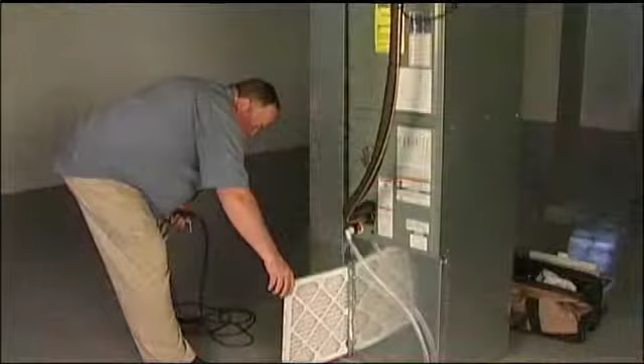It seems like the price of energy keeps going up. As a result, many people are learning to reduce their energy costs by using energy more efficiently. In this module, we'll discuss several ways to be more energy efficient so you can save money on your utility bills. But before we look at what we can save, let's first look at what we spend.

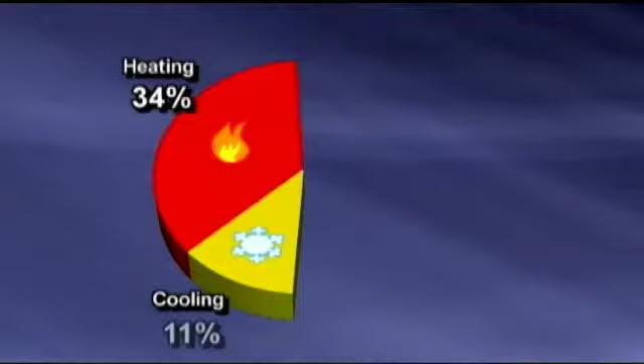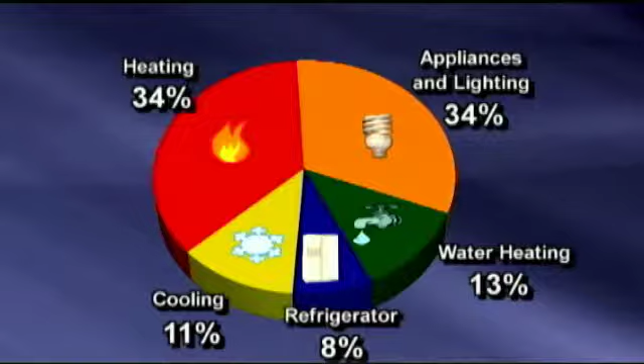The largest part of the average utility bill is spent on heating and cooling. According to the U.S. Department of Energy, the typical home uses about 34% of their total energy for heating and about 11% for cooling. Refrigerators account for about 8%, while lighting, electronics, and other appliances make up about 34%. Finally, water heaters use about 13% of the total energy cost in our homes. Throughout this module, we'll see how you can use less energy in each of these areas.

Section A, Heating and Cooling. As we've seen, heating and cooling uses more energy than anything else in your home. As a result, it's also the area where you can save the most. To begin, we'll look at the winter months and see how you can save money, yet stay comfortable during the coldest months of the year.

You may be surprised how much money you can save with just a slight change to your thermostat. In fact, during the winter months, you can save up to 5% on your heating bill for every degree you lower the indoor temperature. So, for example, by lowering your thermostat just 5 degrees, your heating bill could drop by 25%.

During the winter, we recommend setting your thermostat to 68 degrees during the day if you're at home, and at 63 degrees when you're asleep or away from home, unless you need the temperature higher for medical reasons. It's a good idea to turn the temperature down at night since you'll save energy and money while you sleep.

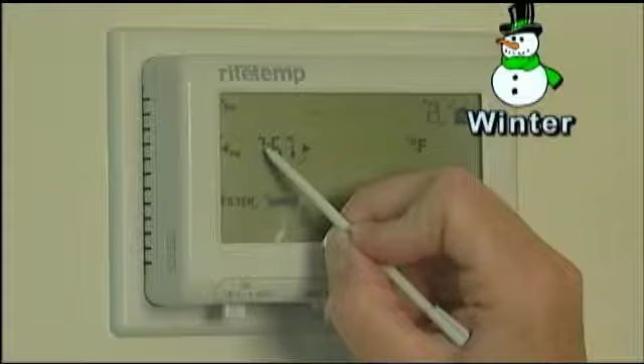If you don't think you'll remember to turn the temperature down, you can always buy a programmable thermostat to change these temperature settings for you automatically. Make sure you buy the programmable thermostat that's suited to the type of central system you have. And if you have room-by-room heating with individual room control, set it back or turn it off in rooms you're not using.

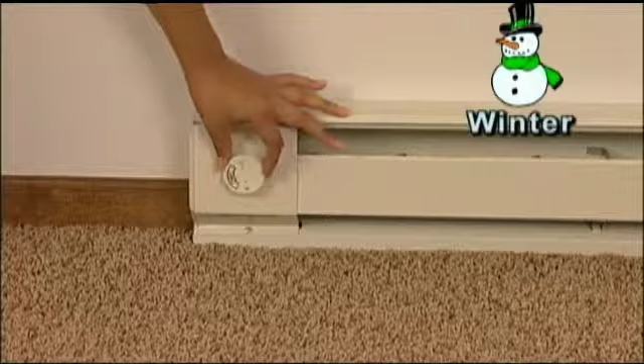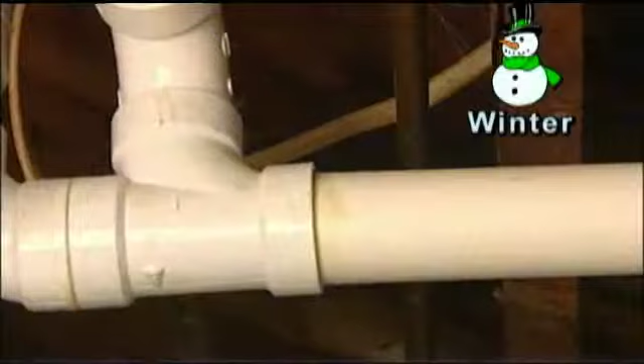Finally, if you're going to be away from home for several days or longer during the winter months, we recommend setting your thermostat to 55 degrees. If you shut your heating system off completely and your house gets too cold, water in your interior pipes can freeze and cause them to break.

By setting your thermostat to 55 degrees, you'll still save a lot of money on your utility bill, but your house probably won't get cold enough to freeze your water pipes. If you rent, it's a good idea to talk to your landlord or building manager before setting your thermostat this low.

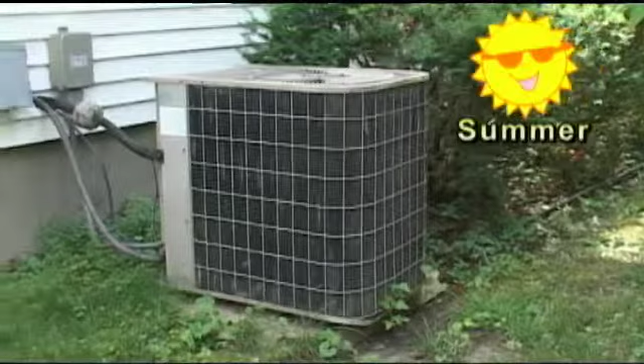Now, let's skip ahead a few months, from winter to summer. During the hot summer months, only run your air conditioner when it's necessary. In the evening or on cooler summer days, open up your house and use fans to bring air in. Take advantage of moderate temperatures and lower humidity when you can. After all, there's no point in air conditioning your home if you don't need to.

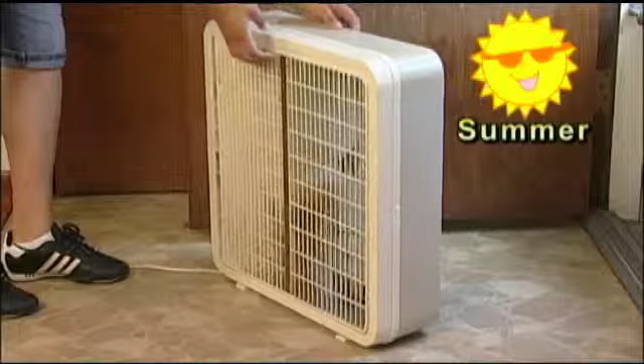When you do need to run your air conditioner, close up your house and set your thermostat to 78 degrees. To make your house even more energy efficient, here are some additional summertime tips. Turn up the thermostat 3 to 5 degrees when you're leaving for work or going away for a weekend. Install ceiling fans throughout your house. They can make the temperature seem about 4 degrees cooler inside.

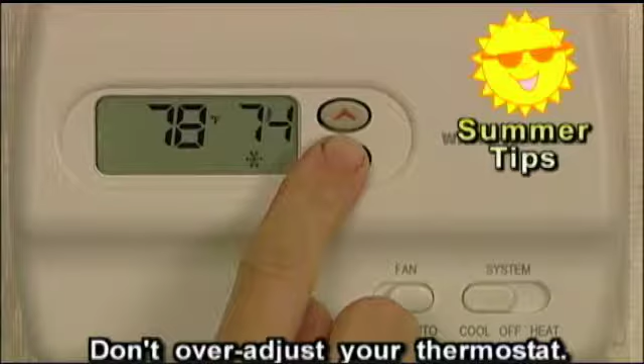If you have window air conditioners, only use them in rooms where you spend most of your time. Use your stove and other heat-producing appliances early in the morning or late in the evening. Remember not to adjust the thermostat to a colder temperature to cool a room quickly. The room won't cool any faster, and you'll just end up wasting energy. Just set the thermostat to the temperature you want.

Plant trees to shade your home, especially near east and west-facing windows. In addition, evergreen or fir trees can help block cold north and west winter winds. By shading your air conditioning unit, you can increase its efficiency up to 10%. Be sure that shrubs are at least 2 feet away from the unit so they don't block its air circulation.

Keep the hot daytime sun out of your home by using drapes, blinds, or shades on your windows. Keep lights low or off and use fluorescent lights since they produce less heat.

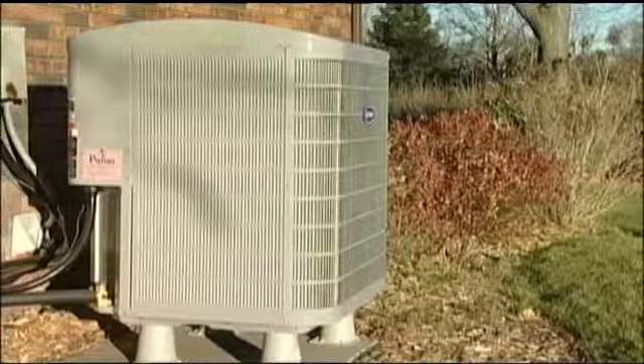So far, we've seen how you can use your heating and cooling equipment more efficiently. Next, we'll look at how to keep it running properly and safely. Without regular maintenance, your furnace, air conditioner, heat pump, and other equipment can become less effective or even dangerous. To keep everything running right, heating and cooling equipment should be checked and serviced every year by a qualified professional.

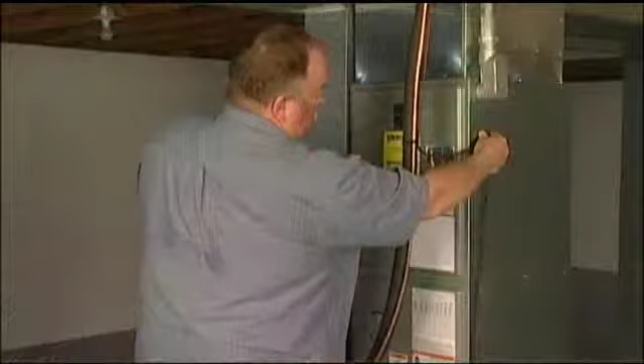If your furnace isn't running properly, or if you have a blocked flue pipe, it could spread dangerous carbon monoxide through your home. Carbon monoxide is an odorless and colorless gas which can kill. Symptoms of carbon monoxide exposure, such as headaches, dizziness, and nausea, are easily overlooked since they can seem like the flu. To protect yourself and your family, you should install carbon monoxide alarms on each level of your home and check them every few months.

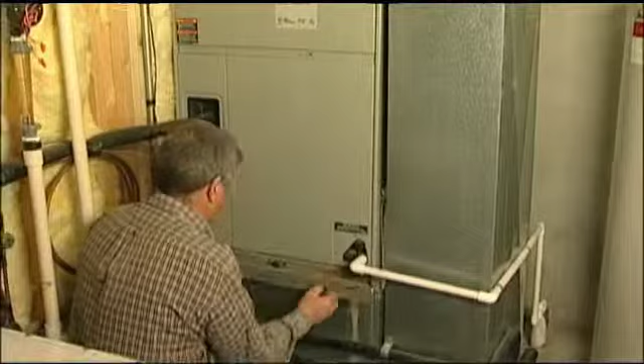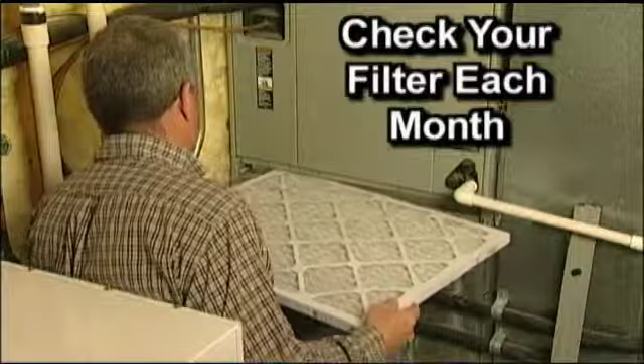But even with these alarms, it's still very important to schedule a professional inspection of your heating and cooling equipment each year. In addition to the yearly inspection, you'll also need to clean or replace the air filters in your system fairly often. Changing these filters is quick, inexpensive, and easy enough to do yourself. Check your heating and cooling system filter each month, and if it's dirty, replace it. If you are a renter, be sure to ask your landlord who's responsible for cleaning or changing these filters.

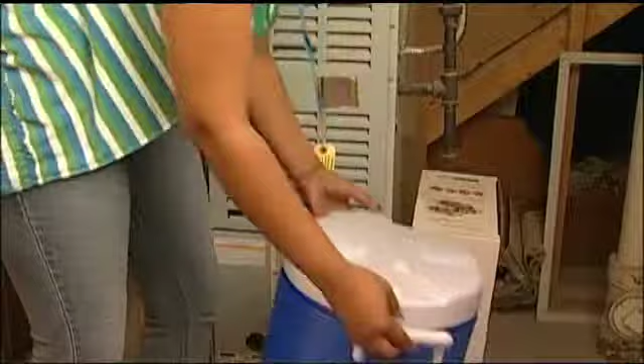Also, since home heating and cooling equipment needs good airflow to work properly and safely, you'll need to keep the area around your equipment clear. In particular, if you have a furnace or hot water heater in a closed area or closet, you'll need to be sure that air can get to that unit easily.

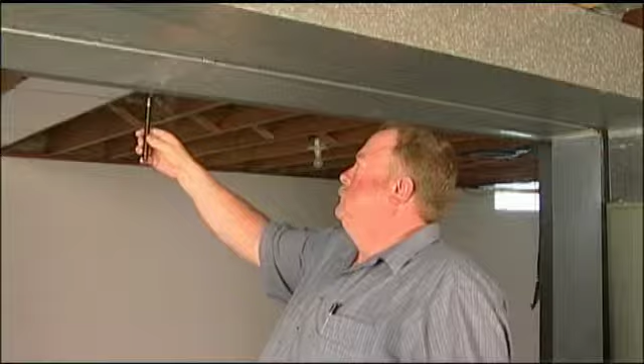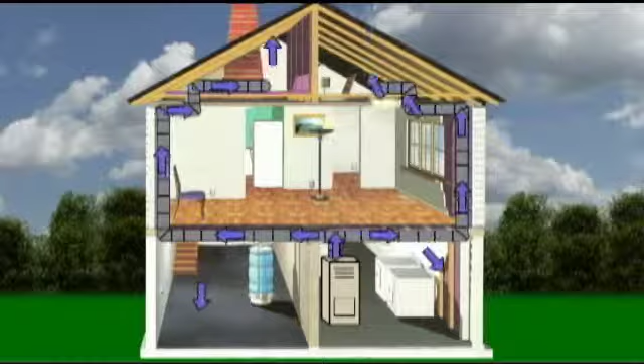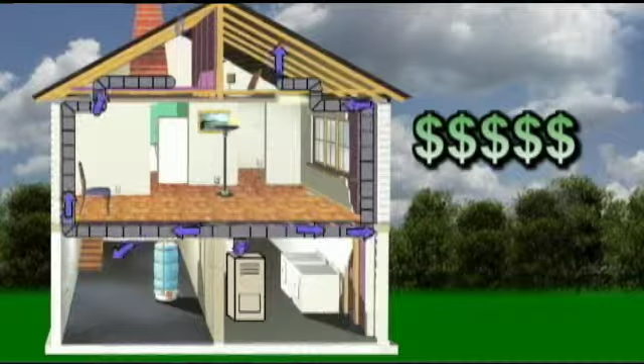To get the most out of your equipment, it's also a good idea to have your ductwork inspected. If you have a central heating or cooling system, conditioned air moves through the ductwork to each room in your house. If ducts don't move air properly or aren't well insulated, you end up paying to heat or cool air that doesn't go to the right place. Some homes leak 15 to 20% of their conditioned air into attics, crawl spaces, walls, basements, and garages, which can add hundreds of dollars a year to your utility bills.

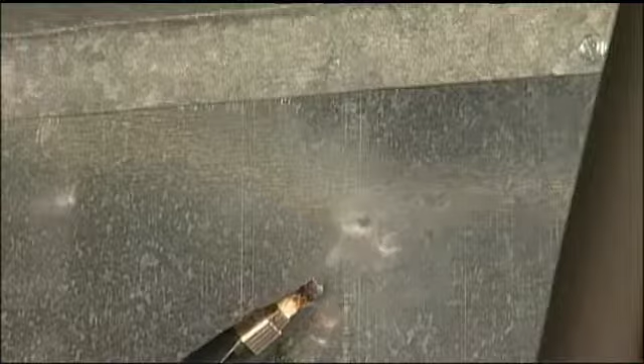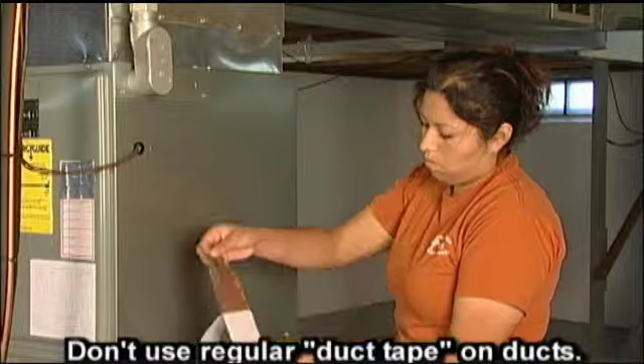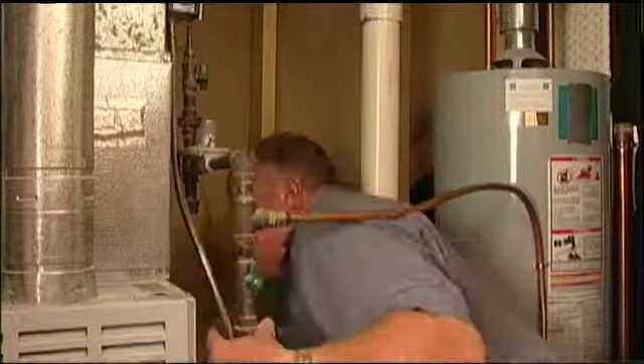To keep your air distribution system working efficiently, it's a good idea to have a professional inspect and test your ductwork for leaks. If you want, you can even do some of the repair work yourself. For example, leaking duct seams are easy to fix. Although some people use regular duct tape to patch ductwork, it's not a good idea, since there are much better products available these days. The proper way to seal joints, seams, and gaps in your ductwork is to either use mastic, which is a thick paste, or Underwriters Laboratories approved foil-backed duct tape. Some parts of your ductwork may be difficult to get to, but don't ignore these areas. Instead, have a qualified professional seal any ducts you can't fix yourself.

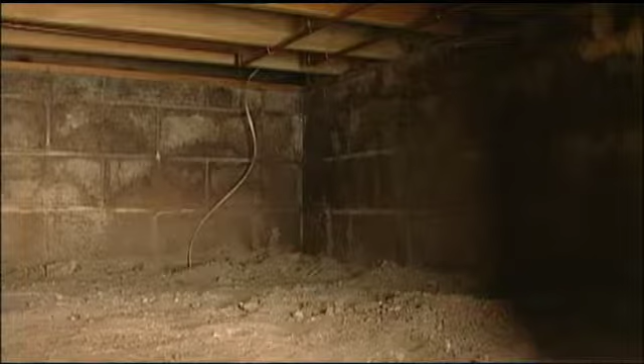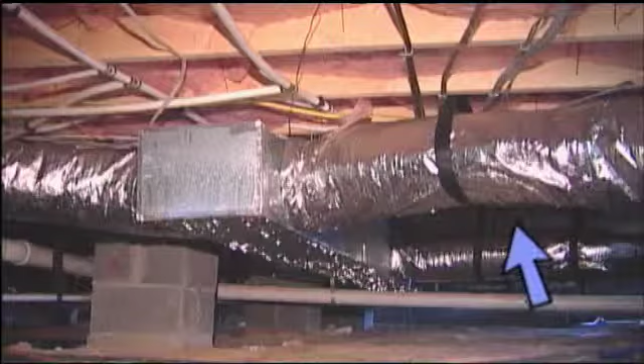If you have ducts in unconditioned areas, such as crawl spaces or attics, you should not only have them checked for leaks, but you should also have them insulated. Keep in mind, however, that during the winter months, insulated ducts will not heat up your attic or crawl space the way they used to. This means that if you have water or drain pipes in the attic or crawl space, they'll be more likely to freeze and crack. So if your attic or crawl space has water pipes, you'll want to talk to a professional before insulating any nearby ducts. If you rent, be sure to ask your landlord if these things have already been taken care of.

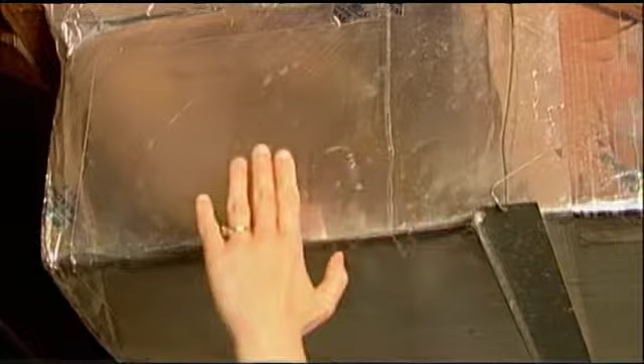Finally, after inspecting, sealing, and insulating your ductwork, be careful not to block the airflow from the air vents, radiators, or baseboard heaters. After working hard to have efficient ductwork, the last thing you want to do is block your vents. Air systems work more efficiently when all the vents are open and unblocked. This will give you an even flow of air throughout your rooms. Air deflectors and extenders are also available if you want to direct the air in a certain direction.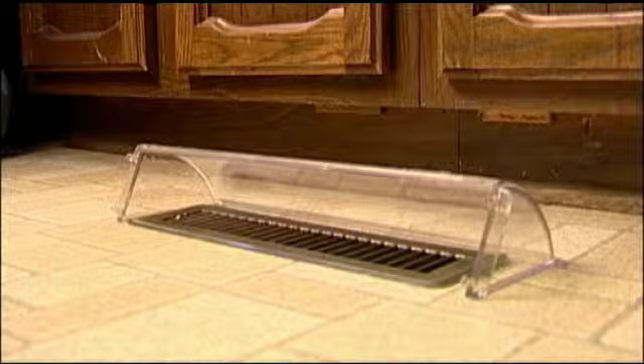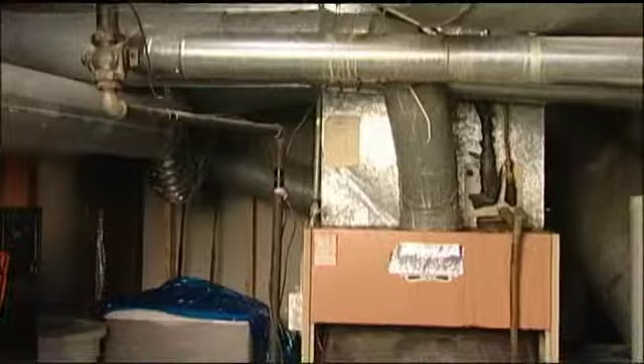So far, we've talked about the maintenance of your heating and cooling equipment. But before we finish, it's important to note that even with the best maintenance, this equipment won't last forever. Eventually, these units will need to be replaced. When you do decide to buy new heating or cooling equipment, look for Energy Guide labels to compare efficiencies and purchase the most efficient model you can afford.

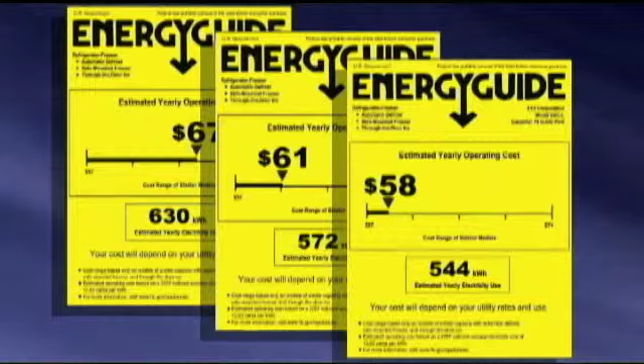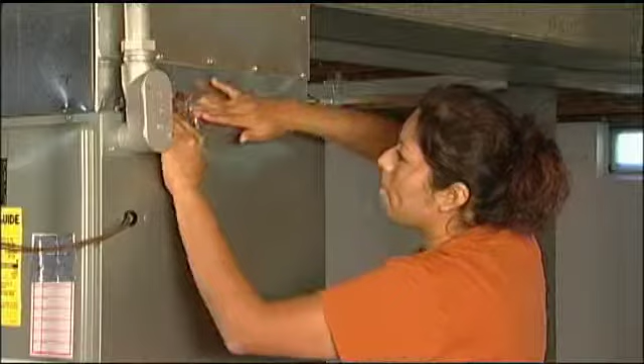As we've seen, heating and cooling accounts for almost half of the energy used in our homes. But with a few simple actions, such as lowering thermostat settings in the winter, raising settings in the summer, changing or cleaning furnace filters regularly, and repairing ductwork, you can dramatically improve your home's energy efficiency. To keep your heating and cooling equipment running properly and safely, have it checked regularly. And if you're purchasing anything new, look for the Energy Star logo and Energy Guide labels. With these tips, you'll be on your way to having a truly efficient and comfortable home.

In the next section, we'll go a bit further and look at how you can improve your home's energy efficiency through weatherization. If you're ready to move on to Section B, Weatherization, just click Continue.